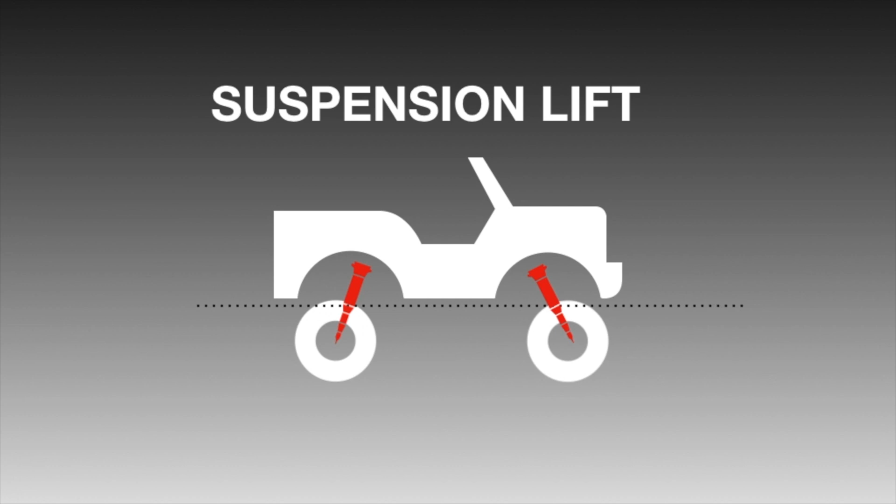Let's get to the pros and cons. The obvious advantage is increasing ground clearance. The body goes up, taking everything up with it and leaving better clearance underneath. Another popular advantage is that lifting lets you fit bigger tires, which makes the ground clearance go up even further, and if done right, you get a killer looking car.

The approach, departure and ramp-over angles, which are very important for off-roading, get definitely better when the truck is lifted up. Water wading also improves because the intakes sit higher.

We do have to watch out for the cons. Even though very minor, the sight lines of the driver change with respect to the bonnet line. Even the headlight throw would be different because they are at a different height now. These can of course be tackled, but we need to know and understand what's going on.

If we choose to go for bigger tires, we should consider the additional weight, because the same suspension is going to have to work harder. The drivetrain has to roll a bigger tire, and the center of gravity moves up in an already top-heavy truck. Off-road, the heavier tires put bigger shock loads on the drivetrain. So we have to weigh the advantages and disadvantages and find a sweet spot between the two.

So before playing around with the suspension, let's see how it's set up on the Force Gurkha BS6. Let's x-ray the vehicle. The front end has a double wishbone independent front suspension setup, and the rear has a multi-link coil suspension with panhard rod.

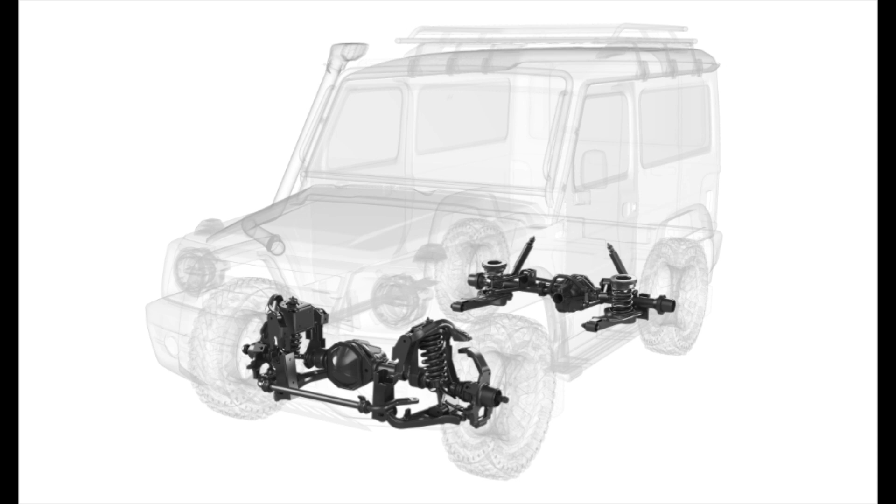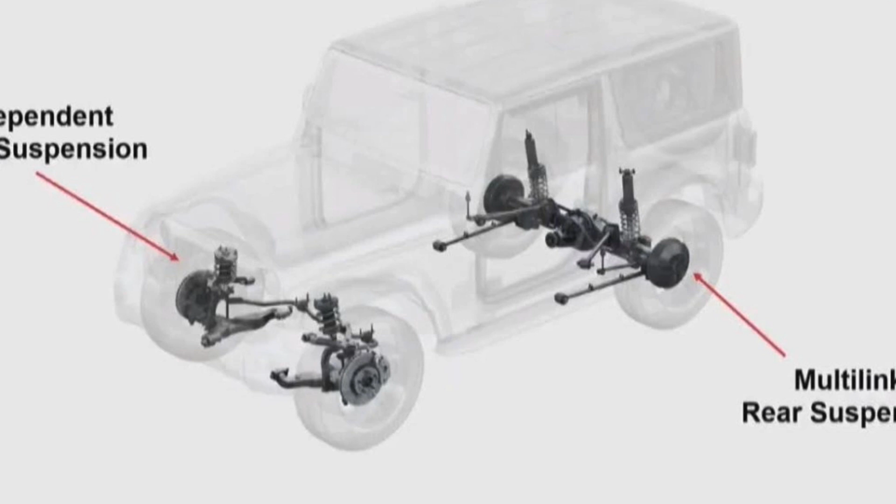Okay, what about the Mahindra Thar, the main competition to the Gurkha? Surprise, surprise, the Thar also has IFS in the front and multi-link rear suspension, but you'll hear more Gurkha owners complaining about the ground clearance because of the peculiar design of the lower wishbone in the front.

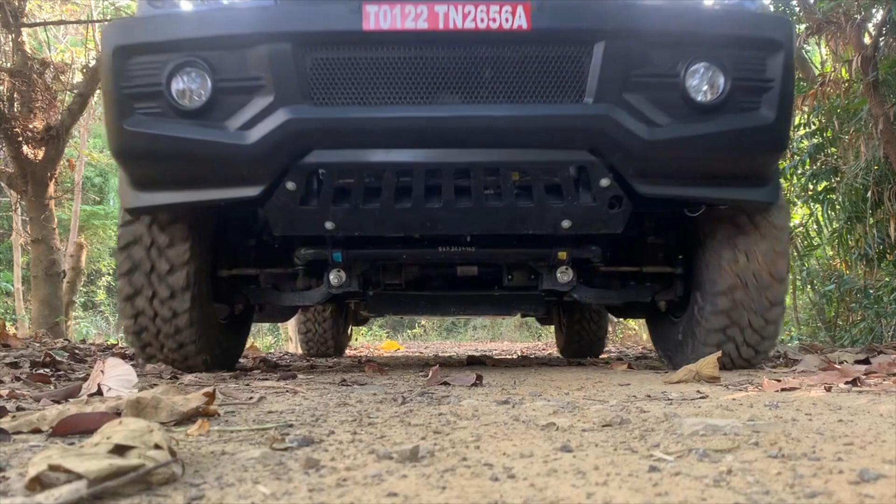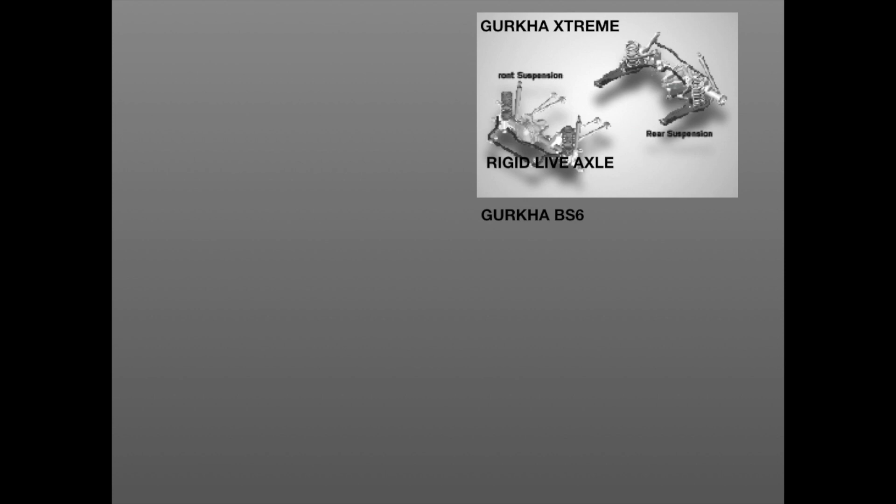Okay, what about the old Gurkha Xtreme? How was its suspension setup? Well, the Xtreme had a front suspension with a rigid live axle, meaning it also had a beam on which the diff was sitting and both wheels were connected, unlike the BS6 Gurkha, which has an independent front suspension. The difference between these two is very important to understand if you're planning to lift your truck.

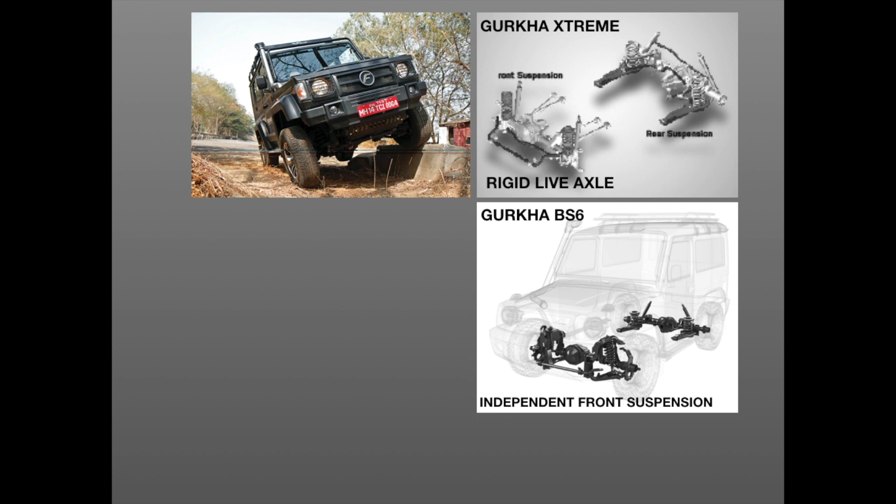While the IFS is a more evolved form of suspension and is great for ride quality and on-road manners, the old rigid axle allowed greater wheel travel, because the longer rod connecting the wheels could make a bigger angle, as you can see in the video. This made it great for lifting.

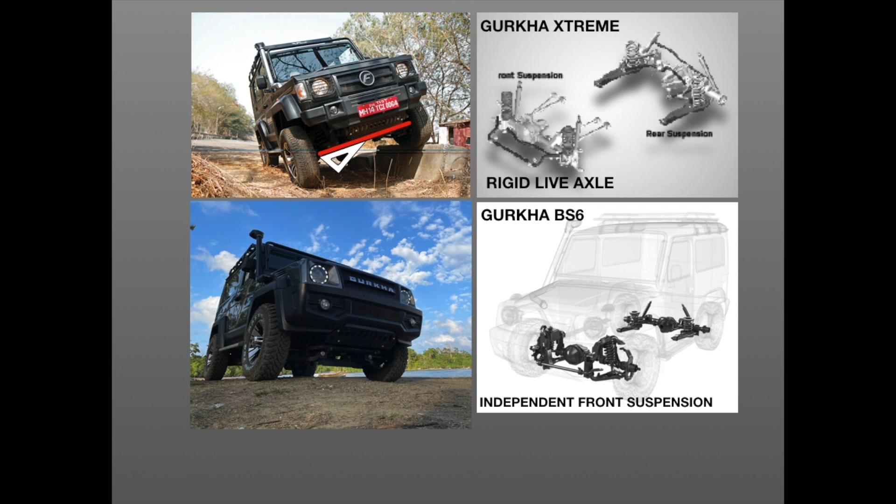And if you remember, the Xtreme in fact came with a 3-inch factory lift. In contrast, the IFS of the BS6 Gurkha has shorter drive shafts connecting to the diff, and each wheel is independent, so the travel of each wheel is lesser, as you can see the angles on the screen. We should remember this to understand what happens while lifting an IFS vehicle.

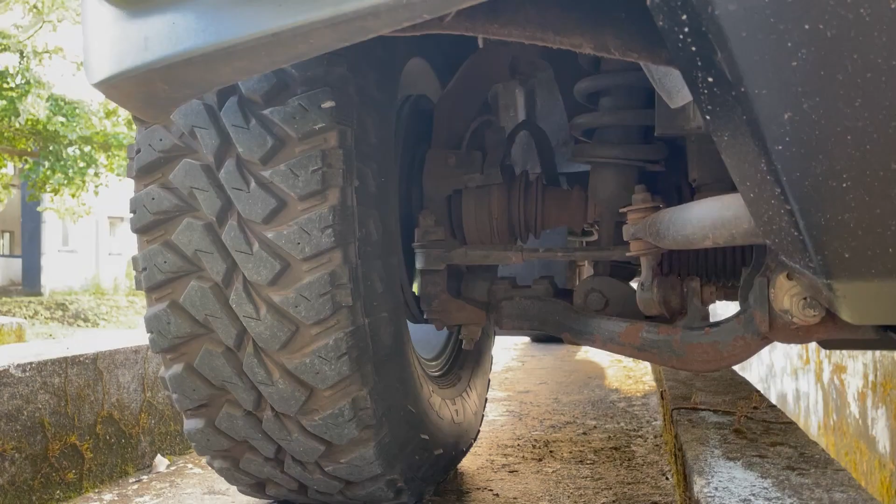Let's get onto the vehicle now and actually see the suspension. Here's the lower control arm.

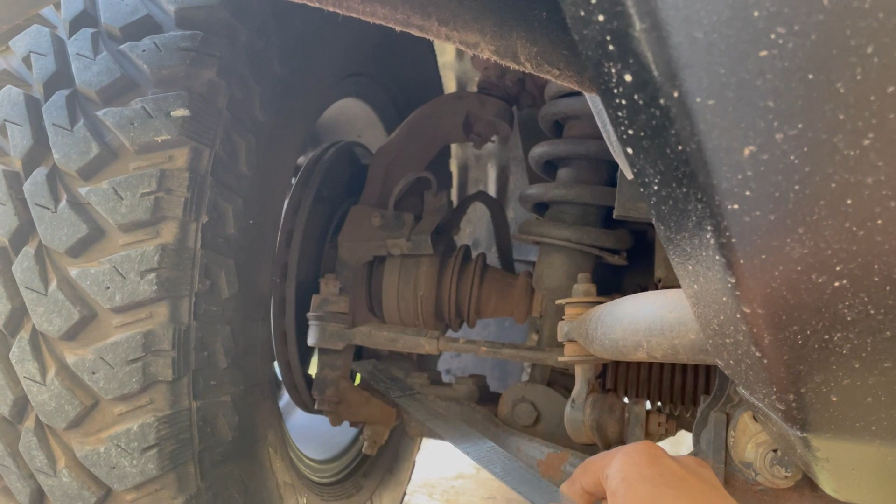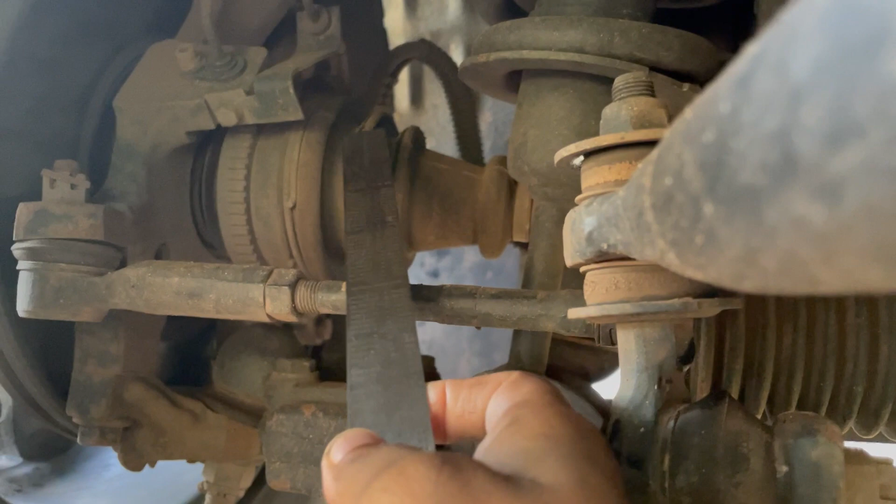Notice that the CV axle is almost parallel to the ground, flat, at 0 degrees. When the wheel articulates, the up travel is called bump and the down travel is called droop. These rubber knobs take that play and act as bump stop and droop stop at either extreme of the limit of travel. Coming to the suspension as such, we have the coils.

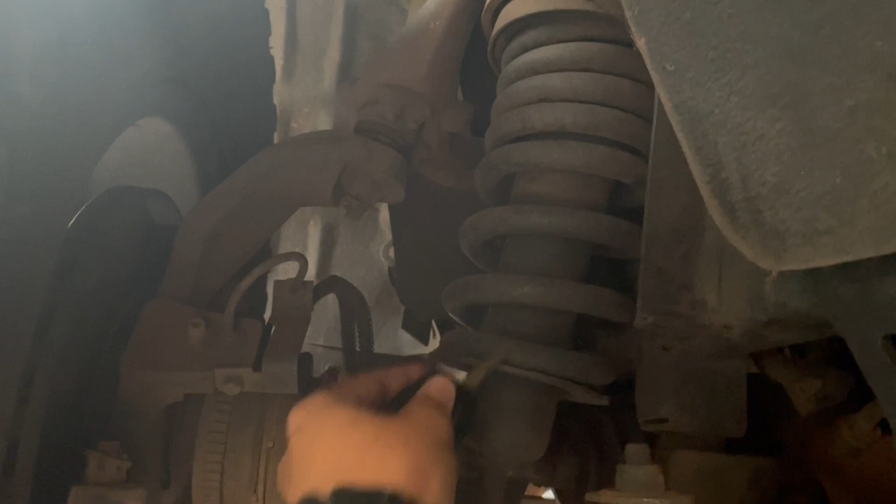They are coiled around the strut, or the shock absorber. The coil takes the weight of everything above it, which is the sprung weight, and the shock absorber acts as a damper. This is where we are going to put the spacer. To understand how the spacer is going to work on the lift kit, we need to understand the suspension. So this is the coil and the strut is inside it.

You can see the upper control arm and this is the lower control arm. This part is what is peculiarly designed in the Gurkha, and here the wheel is here, the hub of the wheel. So this is the strut. We are going to put a spacer on top of the strut, which is going to elongate the strut effectively and push the wheel down.

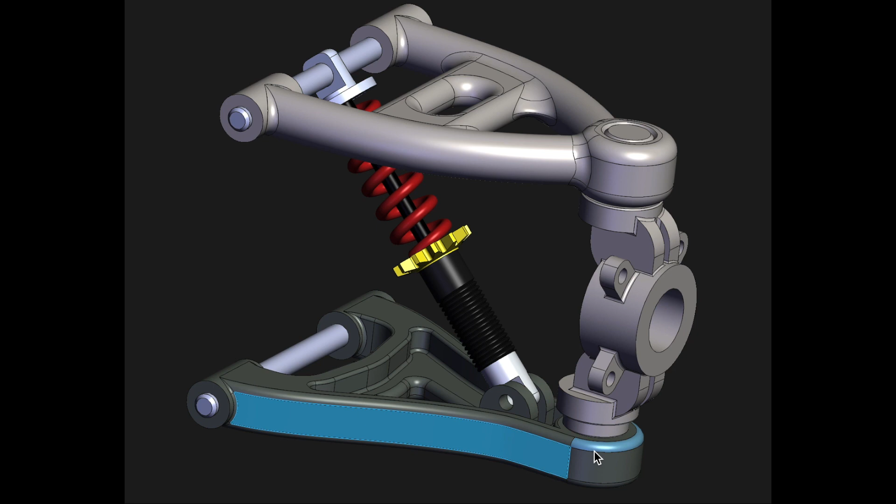So what will happen to the lower control arm? Obviously it will make an angle and go up towards the center of the vehicle. Here you can see the strut and coil working, the steering rod turning the wheel, and the wheel traveling up and down. Let's see what is in the box of the Blue Garage lift kit.

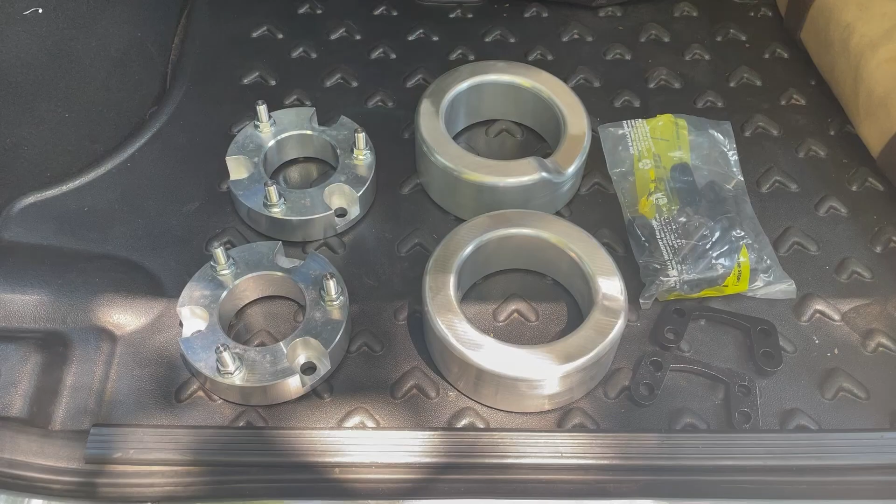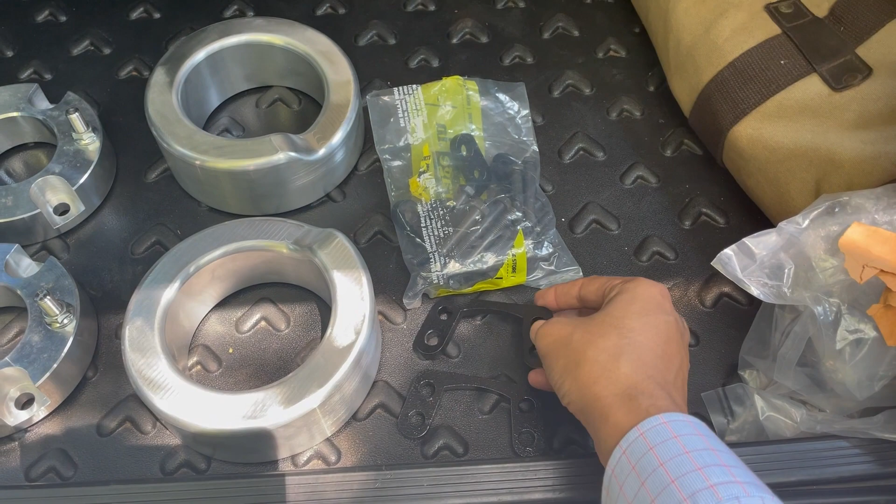We have 2 strut spacers which will go on top of the front struts. We have 2 coil spacers which will go at the bottom of the rear coils, and we have 2 upper control arm spacers which are going to go on top of the upper control arm, and we have all the nuts and bolts which are required for the installation.

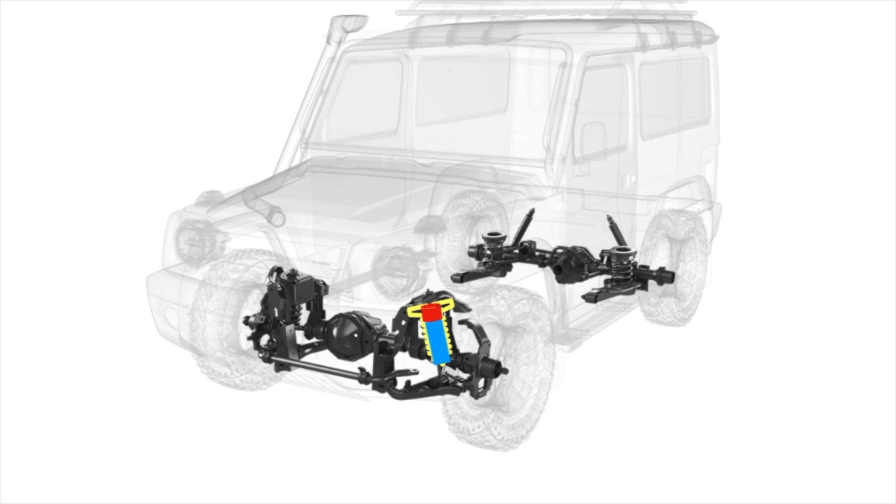Now let's see how this lift kit actually works. So we have the strut and the coil around it. When the spacer is inserted, it pushes the strut down and the wheel is pushed down at the ball joint, and the body lifts up. But since we push the wheel down at the lower end, its axis is tilted.

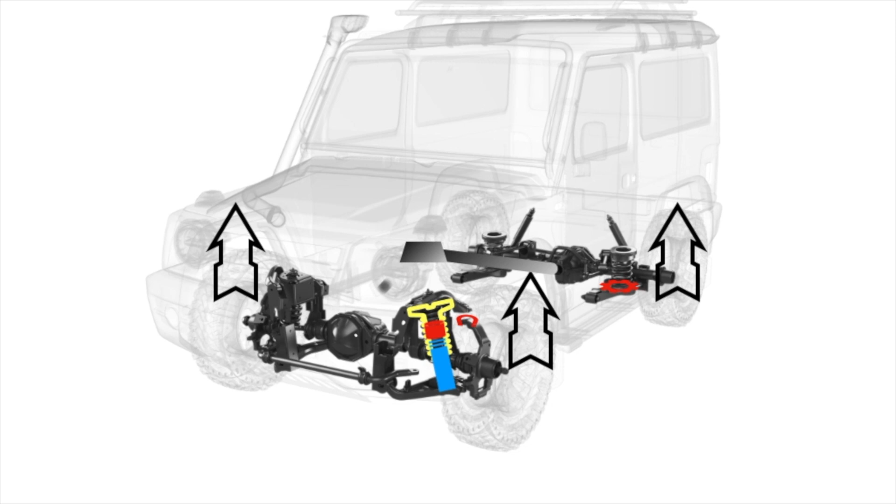So we adjust the caster by inserting spacers on the upper control arms. But note that this only lifts the front end of the body up. So to level it, we also insert spacers below the coils at the rear end. It is important to level the vehicle because remember, there are other shafts and joints running from front to back.

We need to keep those working angles in mind and within limits. Now all that's fine, but many may wonder, how does this lifting actually solve the lower control arm and ground clearance issue of the Gurkha? Because it seems that only the body is being lifted and the wheel and its arms remain as it is. So let us see what happens at the wheel.

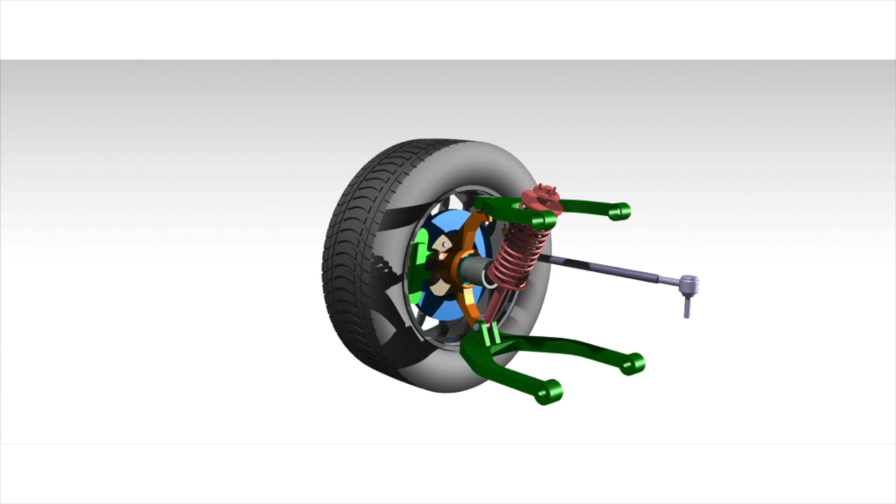Initially, the lower control arms were flat and they were making almost a parallel angle to the ground, so the ground clearance was only this much. But once the strut was pushed down by the spacer, this joint went down along with the wheel, and so the lower control arm actually went up at an angle, and that increases the clearance. So the control arm is actually at a different angle than the original, and that contributes to the additional ground clearance.

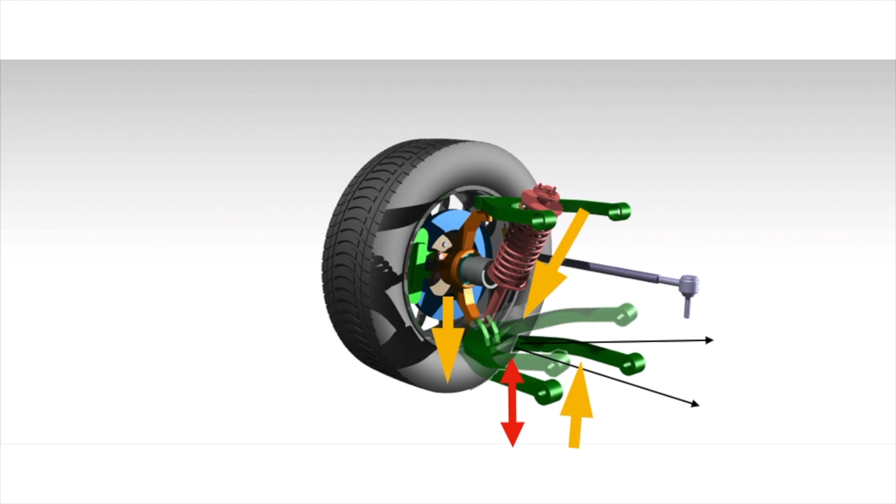Wait, this is only the control arms - what about the CV joint? As we saw some time before, the job of this CV axle is to transfer the torque from the diff to the wheel. It does this through the CV joints.

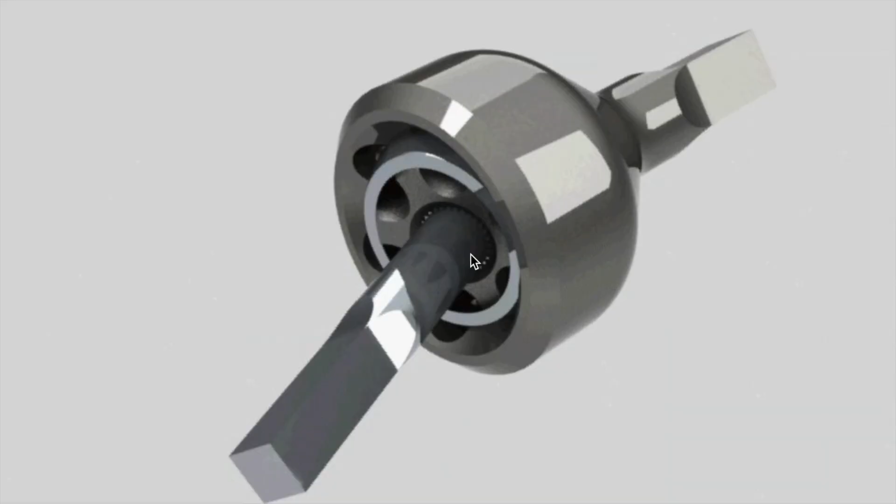These are metal on metal joints which are called CV, or constant velocity, because regardless of the angle at which one shaft is rotating, it makes the other shaft also rotate at the same constant velocity. So if the wheel goes up, down or turns side to side, it doesn't matter.

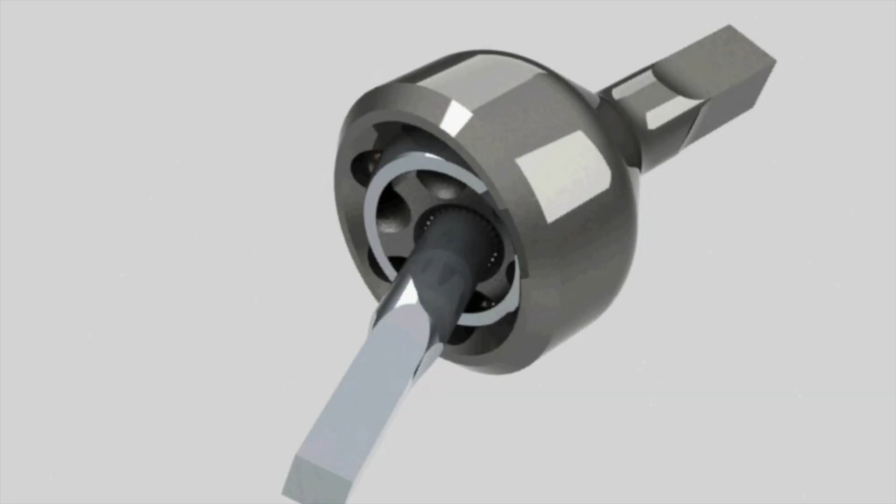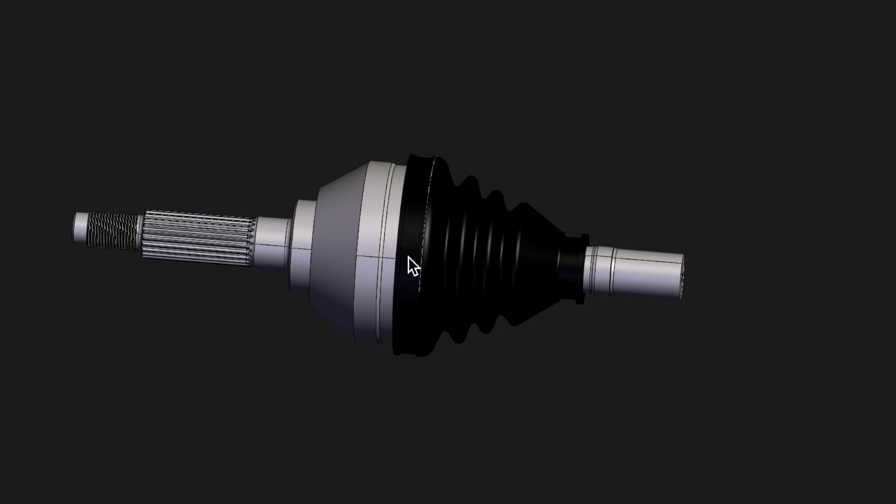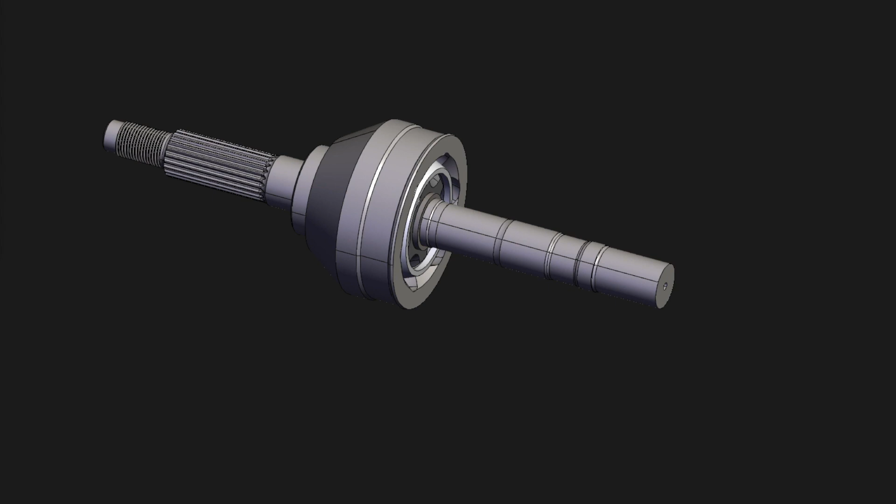The CV will pass on the drive at the same rotational speed, but it is a pretty complex and finicky joint. Let's see how the inside of the joint looks. There is one shaft here and the other shaft here. This is the CV boot, which is the rubber black thing you see. So this is the cage and a cup. If you take it off, you will actually see how complex this joint is. It needs to be this complex to do its work properly, and it can operate through a range of angles safely, but it is always good to have it as close to zero as possible.

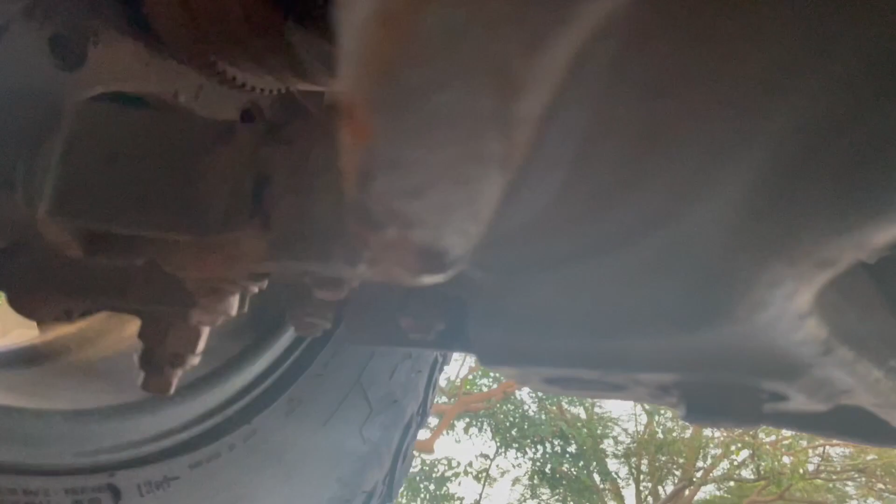Well, that does look complex. So does it break often? Well, if not the entire axle, the boot is the most common culprit.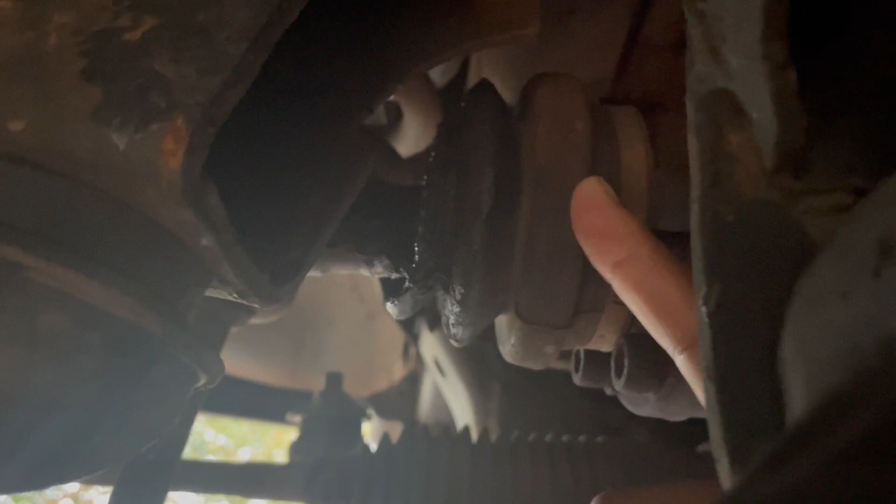As you can see here, some spirited off-road driving has cut and busted my boot on something. If not changed promptly, this will snowball into a bigger problem, because trash is going to enter into that complex assembly through this.

But the biggest enemy to the CV joint is shock loading. The joint is weakest when operating at extreme angles, say at a full turn, full bump, or droop. At that time, if a heavy weight like an upsized tire falls into a dip or ditch, that puts a lot of strain on the joint.

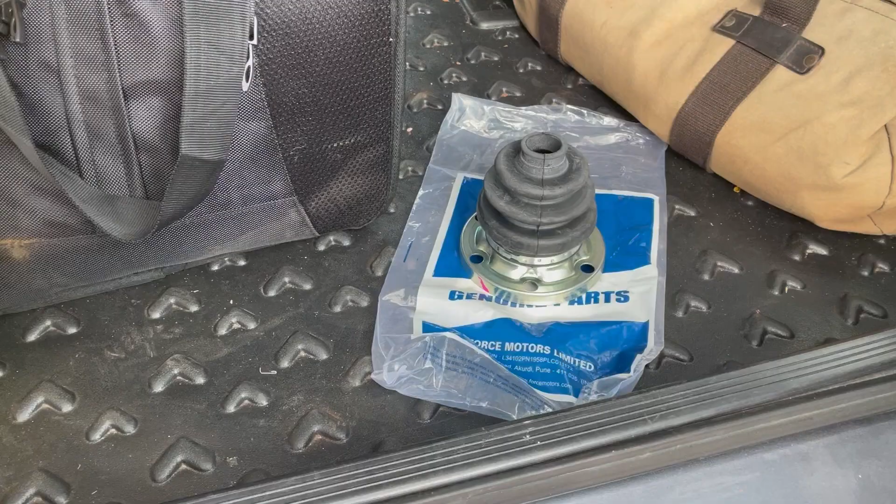That's exactly why we need to be careful with how heavy the wheels are going to be, and we want to keep the joint as parallel as possible so it can use its full spectrum of angle. Not to worry, we will live to fight another day. So here's the spare, and we will fit it when the wheels come off for the lift kit.

Thanks for your patience. Now we will actually see how to install the Blue Garage lift kit correctly. I have shown the full process in 15 steps which are easy to follow.

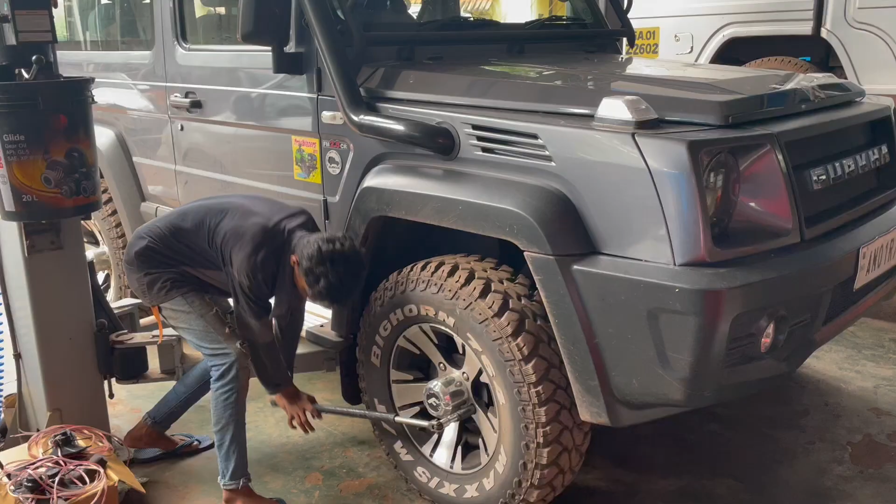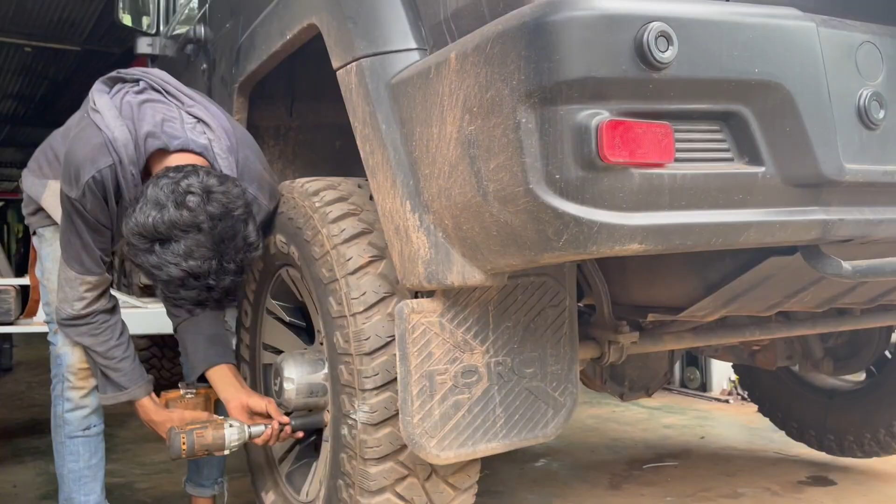We loosen the wheel nuts first, jack up the truck on a lift, and all the wheels come off next.

As a safety measure, disconnect all the anti-roll bars, and if possible even disconnect the CV axle itself. The Blue Garage video tells us to disconnect the clip of the boot only, but I found it better to disconnect the complete axle and put it back after the spacer is in position. This helps you not to strain the CV axle when you're working with the spacer.

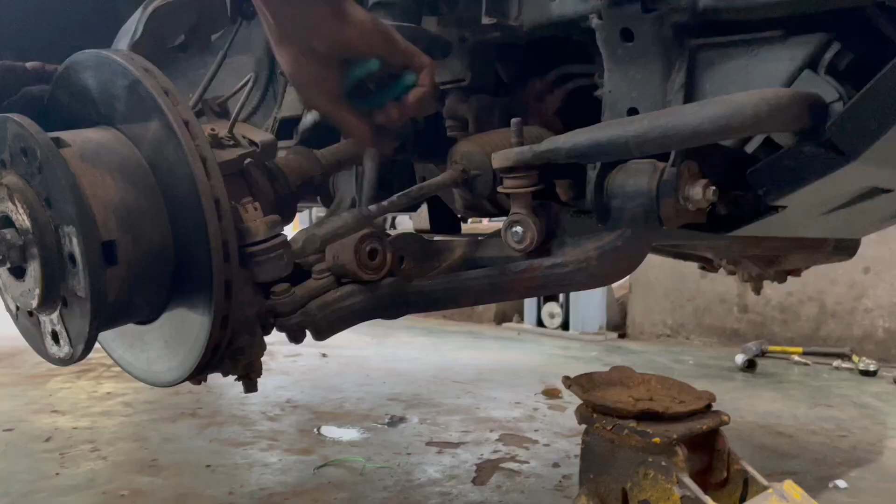The upper control arm bolts and the strut bolts are what need to be taken off. So remove the locking pins first, then remove the upper arm bolts, then the strut bolts go off next. With that, we can pull out the strut assembly.

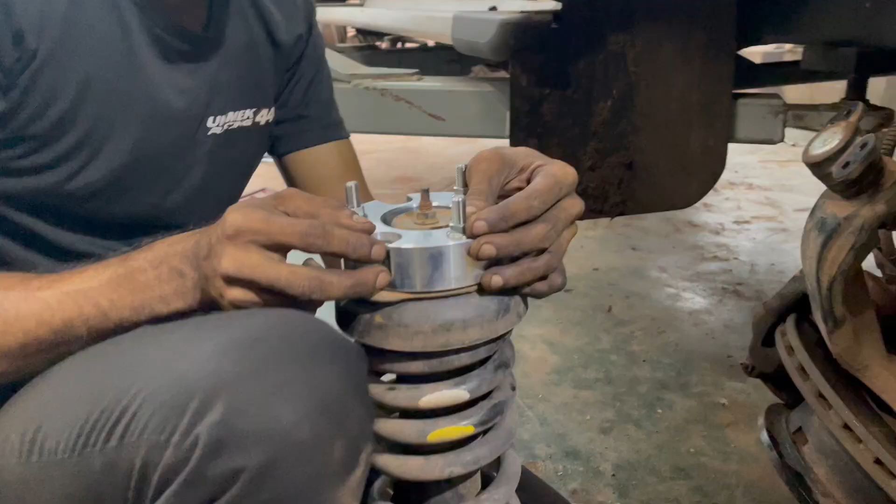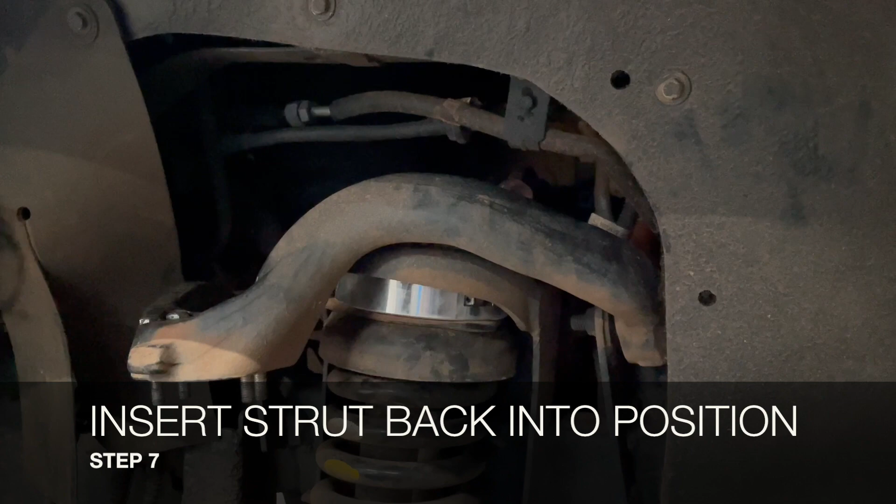Now you can bolt the spacer on top of the strut as shown. The strut along with the spacer can now be fit back into position. The upper control arm spacers bolt on right here.

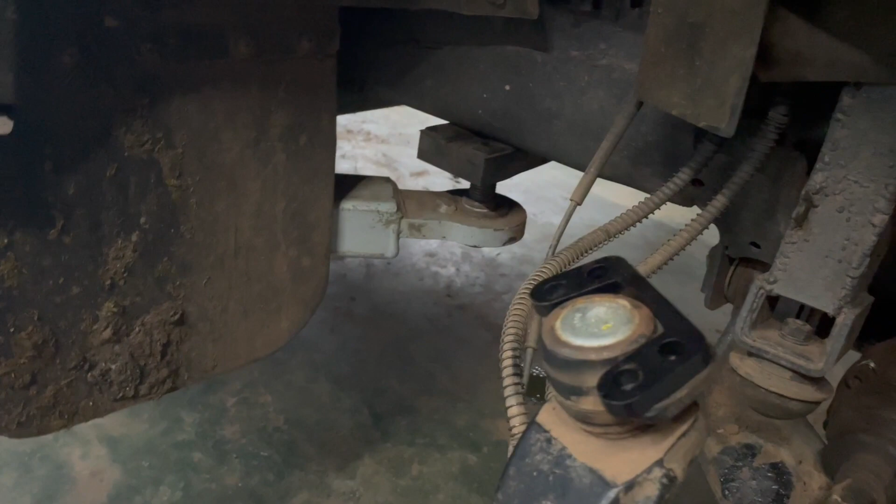Once you've done that, you can put back everything you just removed. We can see the spacer in position.

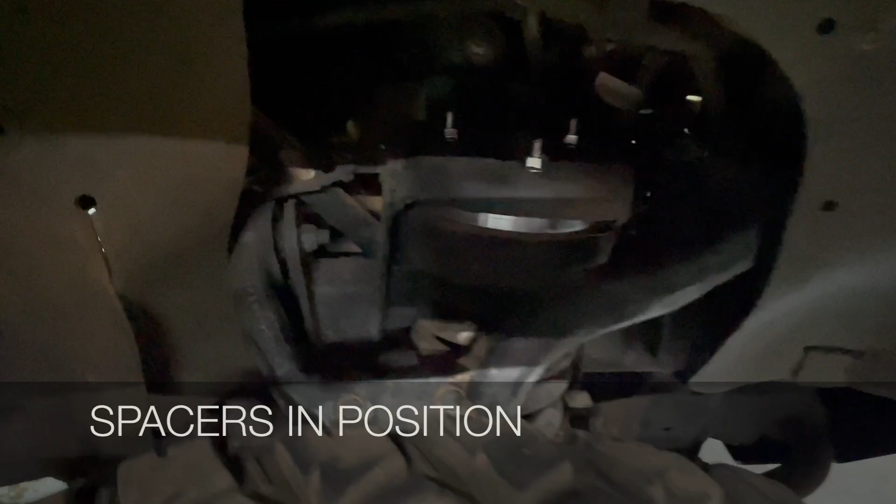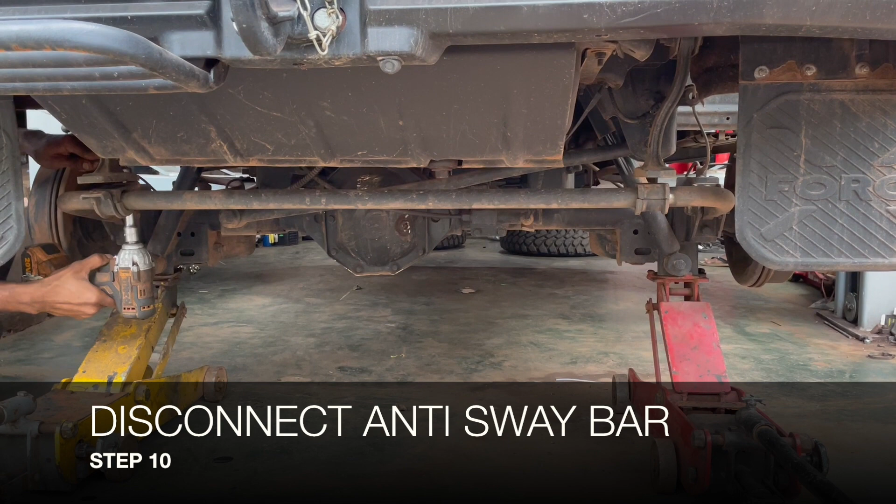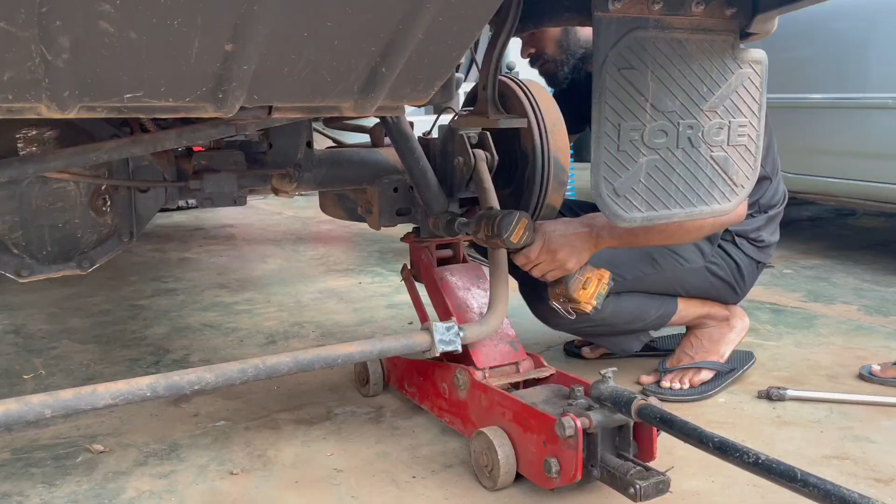Moving on to the rear wheels now. Disconnect the anti-sway bars. For safety, whichever line is taut or stretched, disconnect it and remember to connect it back later. The rear shocks come off next.

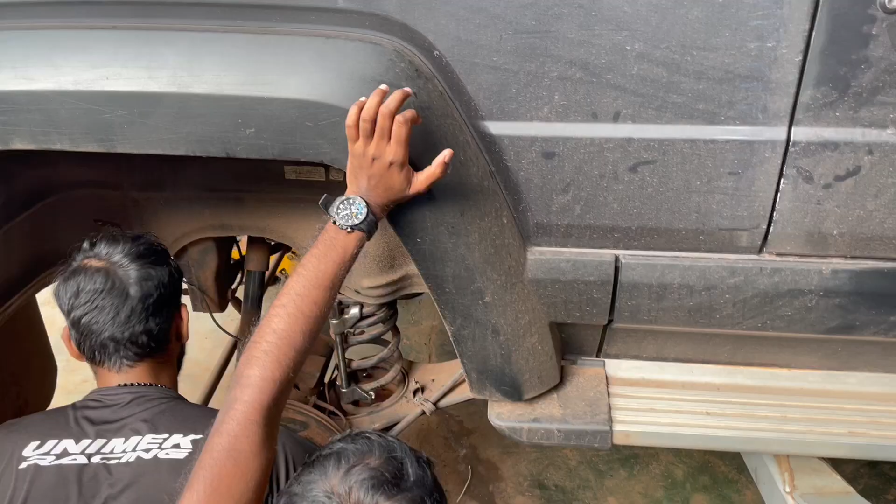Depending on what state of load your vehicle is in, the coil can be a little tricky to pull out. We had to externally compress the spring to take it out.

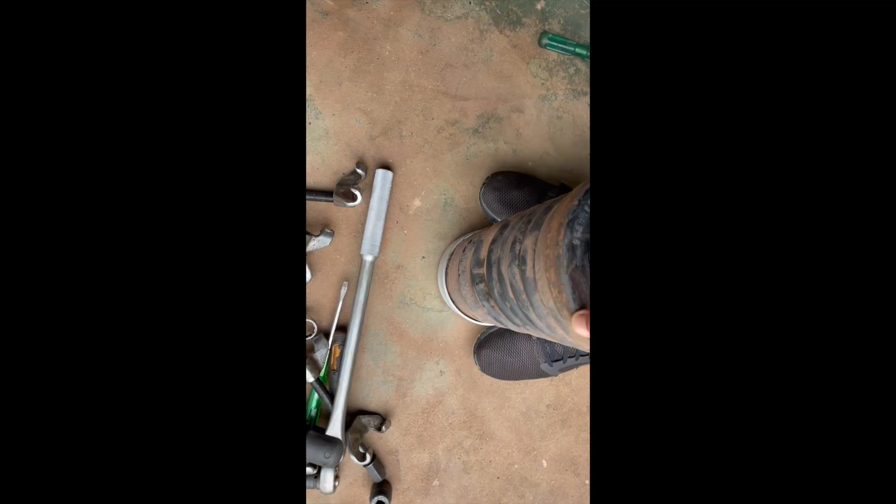Insert the rear coil spacer at the bottom. It is stepped, so it won't be difficult to find the correct position. Put back the rubber on top of the coil.

Make sure that you're putting the spring the right way up. These are progressive springs, which means the pitch changes through the length of the spring. And the spacer has a step, so it snugly fits. There's no problem with that.

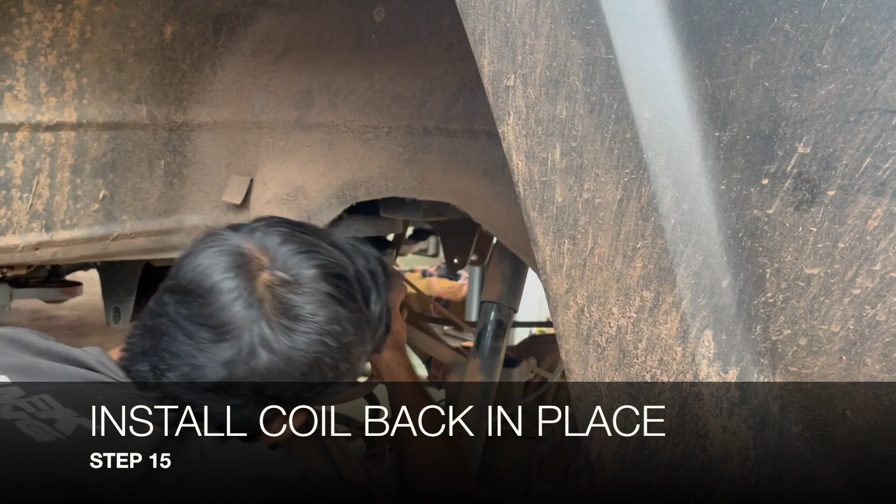After that, install the coil back in place. And so the coils are in position.

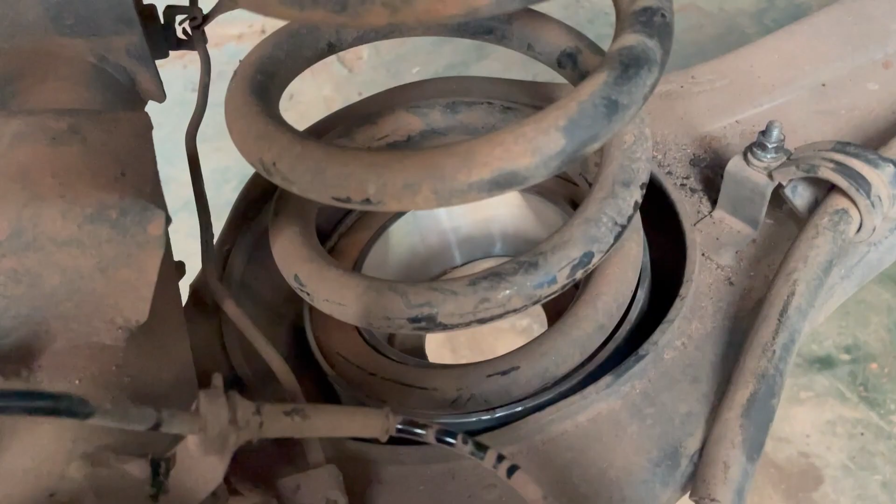At this point, check if the rear shock is already at its full limit. For me, it was already at its full extension, so it was quite a task to bolt it back on. I wish Blue Garage had given us a small joining piece or a spacer for the shock also to retain its range of play, but it became alright after I put the vehicle down.

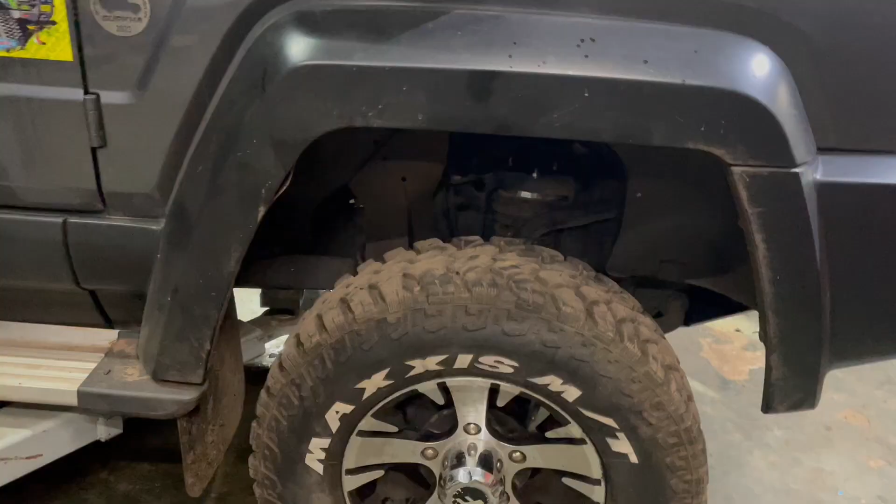All spacers are in place. Bolt on back all the wheels and put everything back together. Make sure you connect everything back, whichever you disconnected. The moment of truth: gently drop the truck back to the ground.

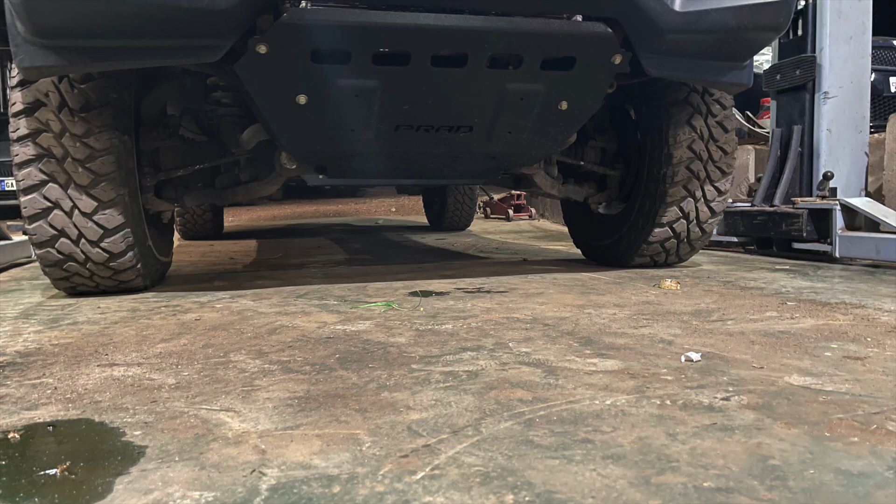And now it's time for the big reveal, the before and after results. And here is the lifted Force Gurkha BS6.

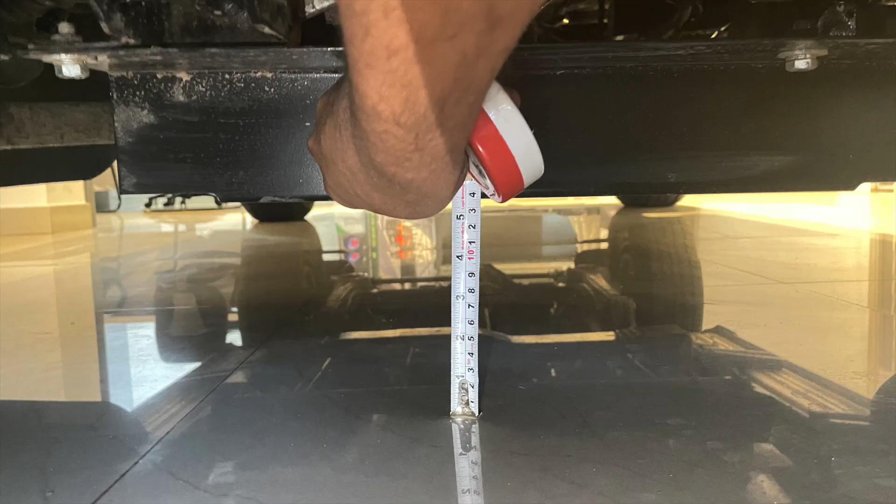To measure the changes, we need a baseline, and what better baseline than a bone stock Force Gurkha in showroom condition at the showroom. The ground clearance at the lower bash plate is 135 mm, and the front fender sits at 845 mm, that is about 33.3 inches.

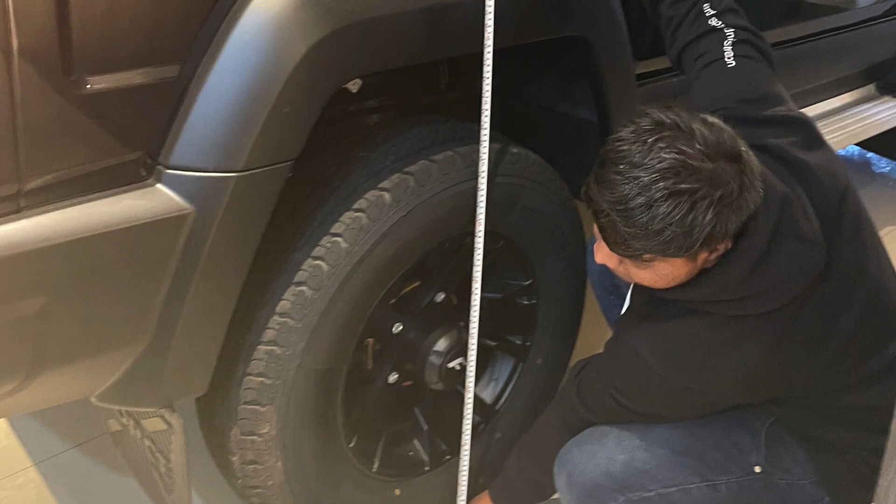The rear fender is at 880 mm, that is 34.6 inches, and the rear diff is at 210 mm. The showroom Gurkha runs 245/70/16 all-terrain tires, whereas I run 245/75/16 mud-terrain tires, which already gives me about an inch of lift.

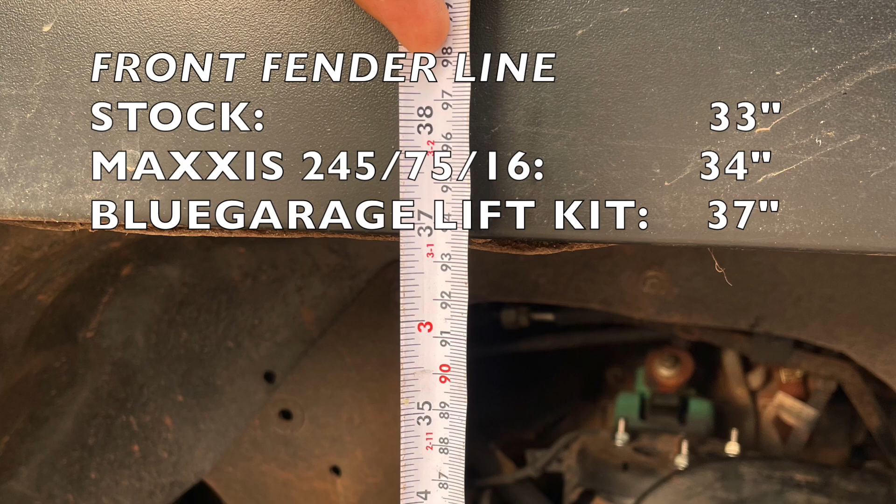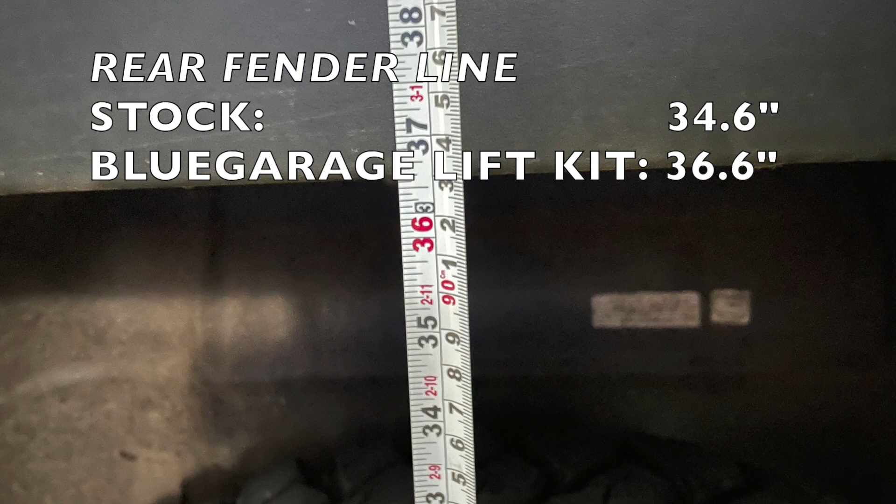The front fender line now has been lifted to 37 inches, which is a clean 3-inch lift over my previous 34 inches. The rear fender line stock was 34.6, and interestingly, the Blue Garage lift kit puts it at 36.6 inches, which means the front lift and the back lift are not equal.

How does the lift kit affect basement parking and garage clearances? Let's find out.

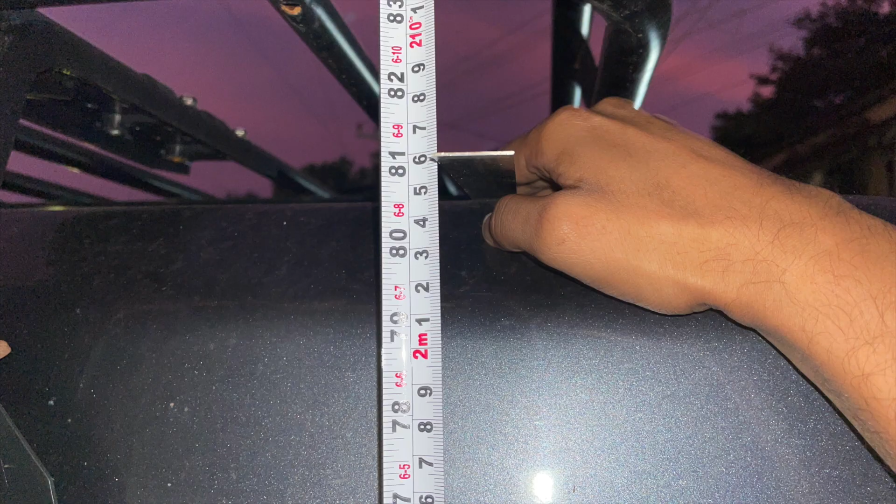On lifting, the roof line is at 2050 mm, that is 80.7 inches from the ground. If you have the official carrier installed, that is at 2265 mm, 89.2 inches, on the left side of the vehicle. The topmost point is the jerrycan line on the right side of the vehicle, which is at 2360 mm or 93 inches from the ground.

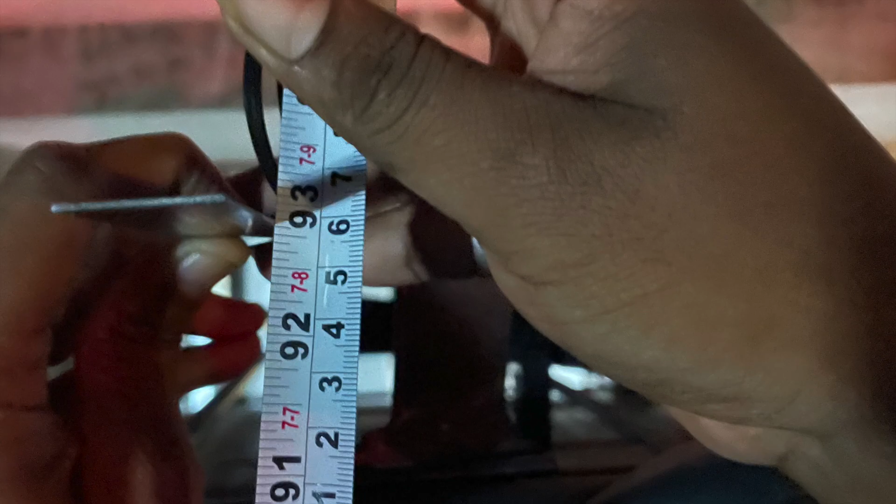That gave me about 235 mm clearance at the center of the vehicle. The lower arms remained the same. Then I went with the Pratt bash plate, trading a little ground clearance for extreme protection.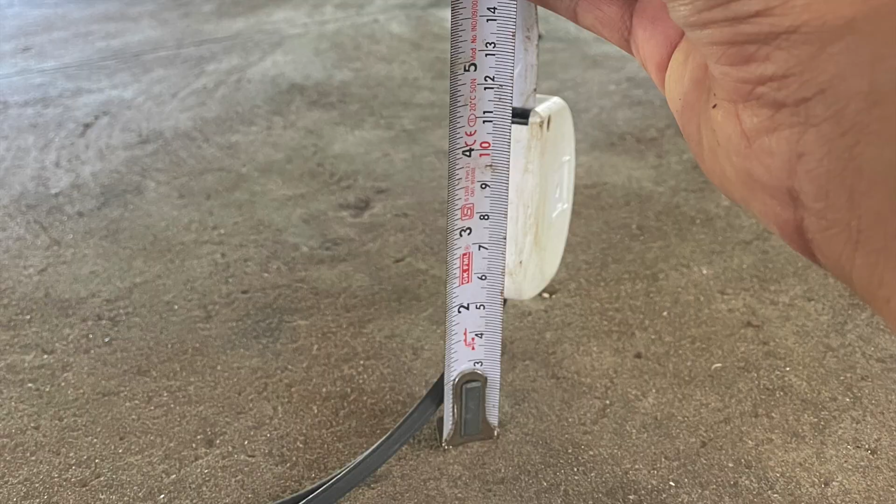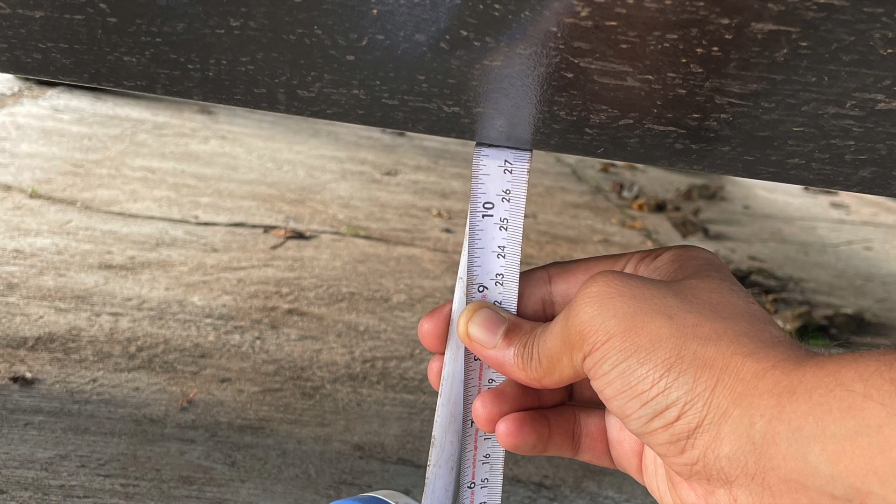And now the Blue Garage lift kit is my fourth mod. Before, the Pratt plate gave me a 200 mm clearance, and now with the lift kit I have a comfortable 275 mm even below the bash plate. This is despite the gap I have left between the diff and the plate.

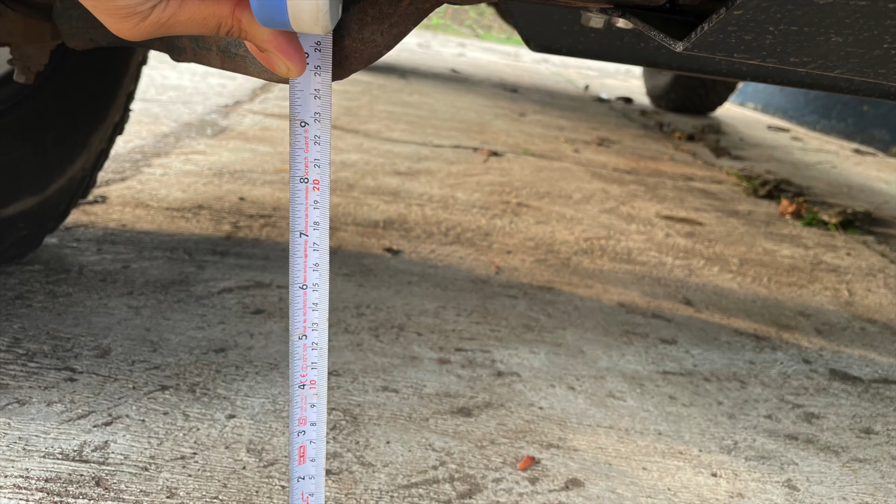This I can adjust a little higher if needed using the bolt setting on the left, but I have left it here. The lower arms are at 245 mm now, and the rear diff sits 240 mm above the ground. The difference in the lift achieved at the front and rear diffs is again because of the IFS, because when the body went up, the front diff went up with it. However, the rear diff is sitting on the axle and didn't rise up with the body.

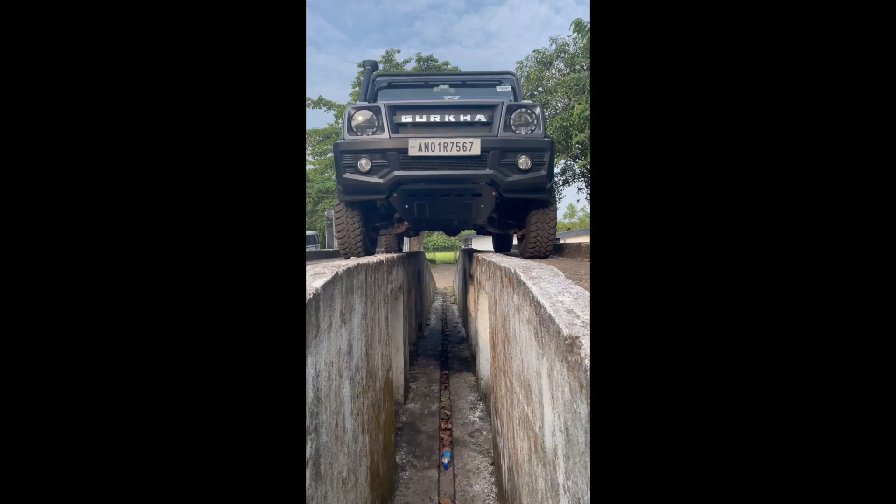And because the diff at the front went up with the body and the wheels went down, the lower arm lifted, but the CV axle is also operating at a slight angle, which should concern us if it's too steep. But here I can see that it is okay and it is still settling down. I measured the angle crudely and it was about 10 to 12 degrees, which I think should be okay.

The proper way to do this, the real solution, is to proportionally drop the front diff also down so that this becomes parallel again, which is something I'll explore in the future, and that's why I left the gap above the Pratt bash plate and the diff.

Do you notice that the clearance between the rubber stop and the lower arm has increased compared to before? If you have watched the full video carefully, you will know the answer why. Let me know in the comments below why that has happened and what is good or bad about it.

Concluding review and some FAQs answered.

After the lift kit, the truck rides taller, but the ride's definitely not harsh. The handling is not affected much more than how it was before. A small observation beyond the obvious: climbing up onto the truck is a little bit more of an exercise, but the sight lines of the driver have definitely changed. You sit taller so you can see farther marginally, but the bonnet line and the higher line of sight puts a small blind spot just ahead of the vehicle. It's a small thing, but it's noticeable.